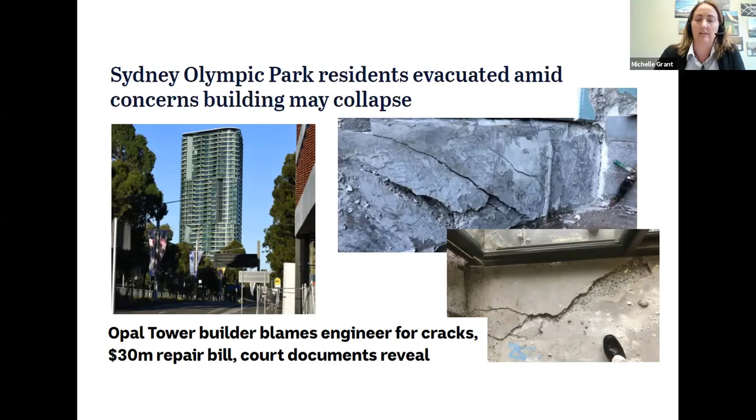In 2019, apartment owners in 9 buildings in the Northern Territory were notified of structural issues in their buildings. They were told transfer slabs were found to be under-designed for punching shear and bending. They're being rectified at the owners' cost, estimates per building of circa $1.5 million. The engineer involved has been named, deregistered from the Voluntary National Engineers Register, and fined the maximum available penalty of $6,320. In 2019, this one in Canberra, a 120-unit apartment building was issued with an emergency order to prop concrete slabs after it was identified there was an imminent risk of punching shear failure.

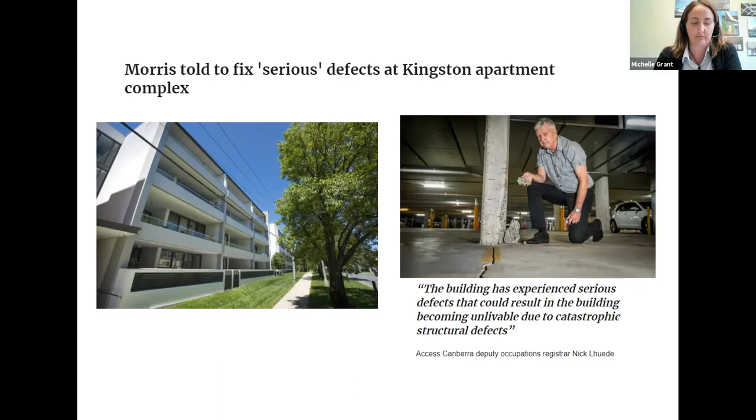And more recently, another one in Sydney in 2019, 10-year-old Mascot Towers, was evacuated after structural concerns were raised. And this was a week before our conference: two 22-storey apartment towers in Sydney were issued with orders preventing owners and tenants from moving in after serious defects were discovered in these buildings.

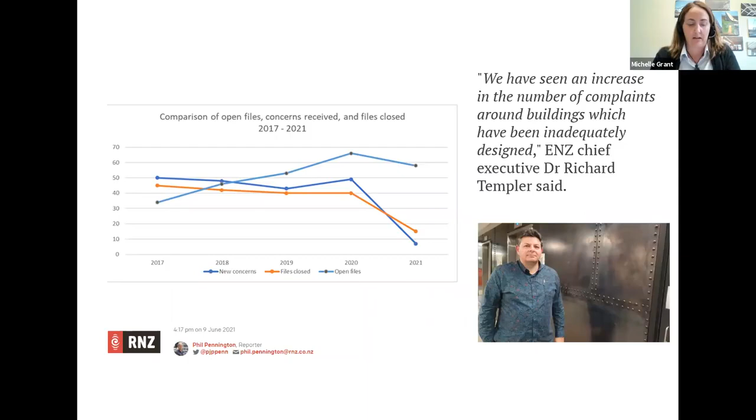Closer to home, back here in New Zealand, we are facing our own challenges. We are still expected to donate huge amounts of time to the development of standards. There's no model around funding of independent technical persons on standards, no model around standing committees and things like that. Engineering New Zealand tell us that we have a mounting backlog of complex disciplinary cases against engineers.

We have a competency system that's currently undergoing review, with Engineering New Zealand acknowledging high-profile failures are undermining public trust and confidence.

We still have poor designs being designed, consented, and built. We have frustrated building consent officers and peer reviewers, with building control officers saying they're getting pushback from engineers who struggle with the scrutiny, which is a natural part of a building consent process.

We have building owners who are being caught out with non-compliant buildings and are losing significant resources and money. So how does this help when we're thinking about new beginnings?

When preparing this speech, I found a quote which really resonated with me, and it was that new beginnings are often disguised as painful endings. And look, there's no doubt that there's some painful points in the things that I've just discussed. I know it's painful when there's another headline on RNZ about another building which has not been designed properly.

But I also see change. And I think in the future, we'll look back on where we are now as a pivotal moment or time for our profession. I see some new beginnings on the horizon. And while this won't be short term, when I look to the future, it does give me some hope.

Case in point, the conference this year was our most successful to date. 4 years ago, we had 230 odd people attend. 2 years ago in Auckland, 260 odd people. This year's conference, we had over 350 people attend.

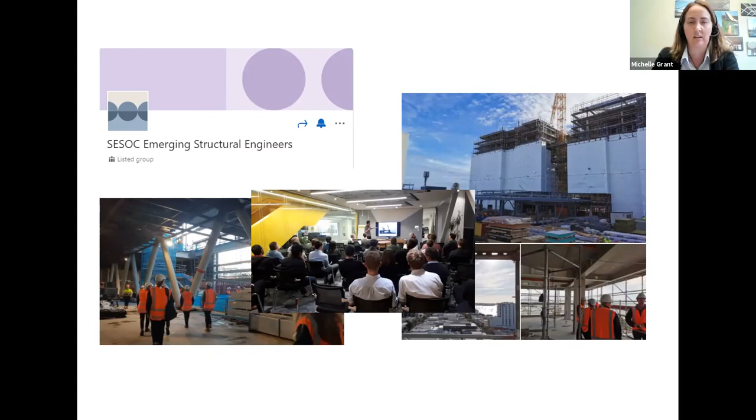In the last 10 years, SESOC membership has grown from 1,380 members to just over 3,000. Our emerging structural engineers group has been established and is flourishing with over 785 members at the time of our conference. We're making some progress in terms of diversity.

To point out the obvious, SESOC has a female president for the first time in 33 years of its history. 3 out of 7 elected members on our management committee are women. Within our professional circles, we have a woman heading the NZSEE and filling the role of President of Engineering New Zealand, and as of a couple of weeks ago, the chair of the New Zealand Geotechnical Society.

Recently, Engineering New Zealand launched their CPENG review process. They've been engaging with us on changes around CPENG. So there's some promising signs that we'll see some change coming in the CPENG space.

We also have a very real chance of occupational regulation going ahead this time. The consultation document that MBIE put forward recently shows a pretty good awareness of the issues that our profession's facing. And more importantly, it indicates a political willingness to proceed with changing the system.

We seem to have more of a consensus as a profession that we need change, more of a groundswell that something needs to be done, even if all of us don't quite agree just yet on what that something might be. We've got the construction sector accord, and part of the transformation plan, central government have specifically targeted the regulatory environment for review.

It's quite refreshing to see a government plan acknowledging the inefficiency of having 69 councils processing consents across New Zealand, and starting to actively talk about finding a better way. So a reason for optimism and hope. And it does feel like there's some new beginnings in our future.

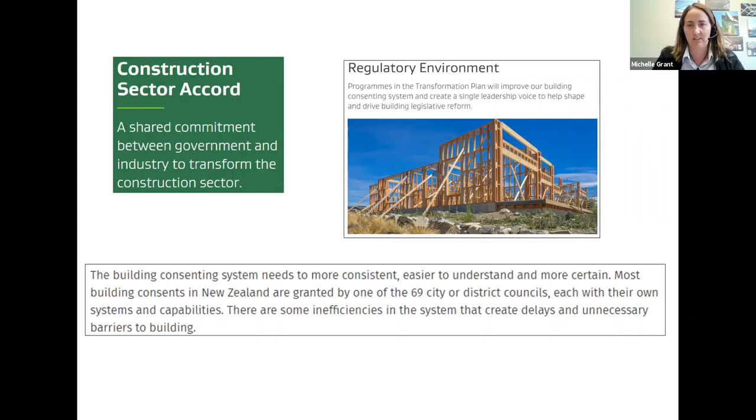This year, for what's left of the year and into next year, I'd like to encourage everybody within SESOC to talk about the changes that you would like to see. For me, with everything we do as a profession, from university teachings to MBIE governments to design office practice, in my opinion, the most important thing is that we have the right systems in place to get it right where the rubber hits the road, that our structures are being properly designed and then built.

Call me an optimist, but I honestly believe no one sets out to do a poor job. No engineer wants to design a non-compliant building. The personal toll to all of us, if we're involved in anything around poor design, is huge. Toll on mental health, financial risk, reputational damage.

In 2013, John Hare penned a paper on the state of seismic engineering in New Zealand. And in this, he reflected that there's clearly engineers actively in practice who are perhaps not aware of their own limitations.

He referred to a paper which talked about a cognitive deficiency as opposed to an ethical deficiency. So to paraphrase, poor engineering is being done by people who just don't know better. And this may be the biggest failure of our current system.

University teaches us the principles, but it's when we start working that we learn the application of structural engineering. And in this regard, it can be the luck of the draw. A graduate coming out of university, someone moving here from overseas, these people will be trained by the people they work for. So the people they work for need to be competent.

We owe a duty of care to the next generation of engineers to ensure they're being trained by people with the appropriate skill level. That being the case, while I'm SESOC's president, I'd like to focus on service for our practitioner members. By necessity, a lot of the work we do in the SESOC Management Committee is political, high-level political work. And while that is important, the main thing I want to know as a practicing engineer is how to design it right.

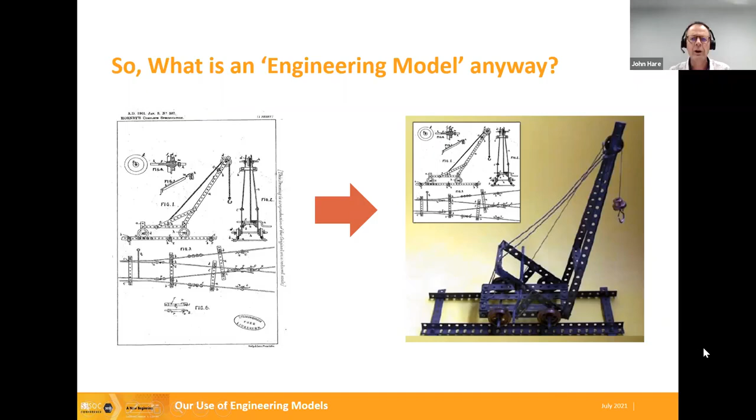What is a model? I think is a key question here. So lots of people, some people, at least as children of about my age, probably used to play with Meccano, for example. And as you could see, we could work in those days from a little drawing like this, perhaps, and eventually produce a model like that, perhaps, or better still, work from our own imaginations and come up with something. Times have moved on.

We're much more likely these days for kids to have things like Lego to play with.

And that's another way of thinking about what some of the original engineering models are, perhaps, that we think about as we grow and develop as people. I could say we then go on to school and university and have some of the creativity knocked out of us until such time as we get out into practice and try and develop it all over again.

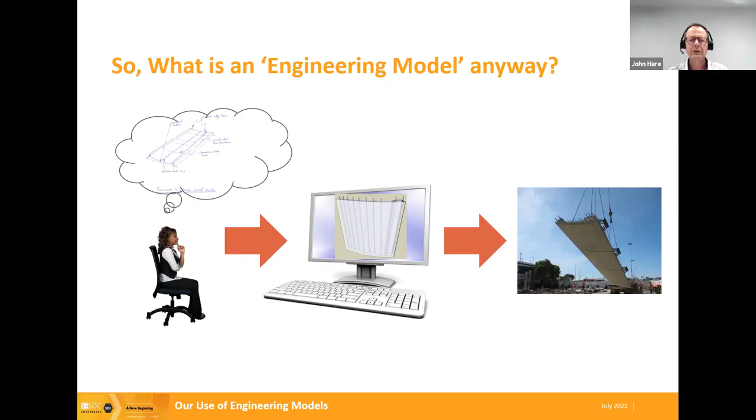Now, a group of two people, David Elms and Colin Brown. David Elms, a former professor at the University of Canterbury, got together at some point and put a lot of names to the different types of models. I think they had around about 16. I'm only interested in the 4 that I think are the ones that we mostly use.

First of those is the conceptual model, the paper napkin sketch that we do, the thing where we start thinking about how we develop whatever it is that we're setting out to design. That might flow through into what they termed a learning model. That's where we might start to get onto that computer we talked about and start testing different aspects of that. We might start designing parts and components, so we might have a model which is all of the system that we're looking at.

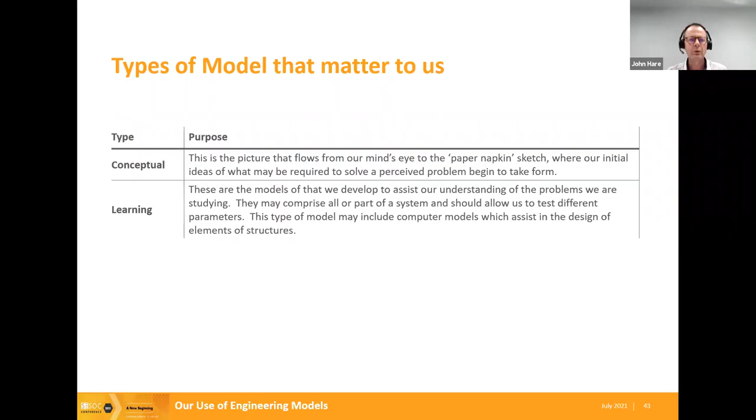We can then think also of an analytical model, and it's quite important to distinguish the definition of an analytical model here, which is what we use to validate our solution. So it might be something like a time history analysis, for example, as distinct from learning models, because most of what we think of as analysis is in fact preparing the assembly of those learning models.

And finally, the blueprint models. That's actually what people build from. So that's the drawings, the BIM models, whatever it may be, specifications - effectively the set of instructions that we pass on to a builder to then implement our designs.

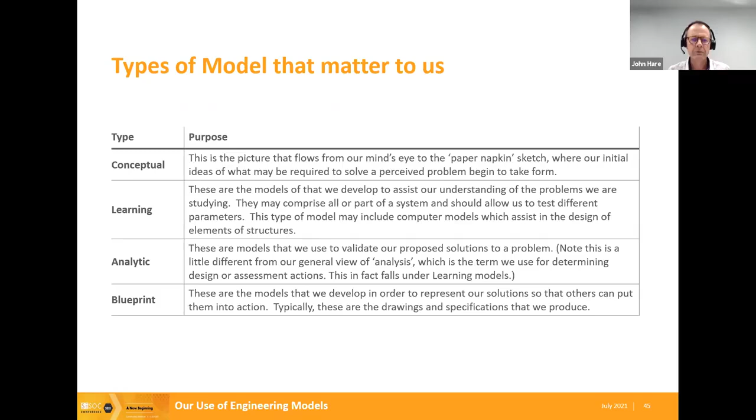One of the things we should always avoid is what's termed a prediction model. In fact, the word predict is a bit of a dirty word, I think, in structural engineering. The reason is because a real prediction is a forecast of exactly what will happen, and it requires us to know all sorts of things about all of the data which may apply and everything that may happen to our building, assuming we're talking about a building in use. So by definition, because the building is not even built when we're thinking about it, we don't have the information to be able to predict accurately things that are going to happen.

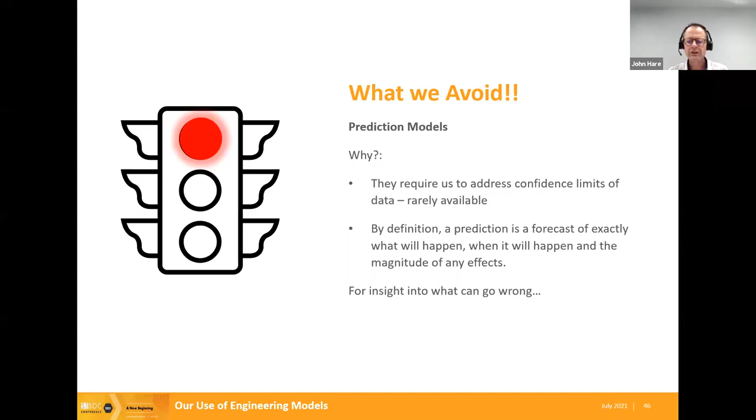Just to show an example, which I'm happy to say is not actually from structural engineering - it's always nice to learn from others' mistakes, but something which is illustrative of exactly what can go wrong. This is a toll road near Brisbane Airport, which opened some years ago now, nearly 10 years ago, and failed within 1 year of operation. The reason being that the traffic only ever reached 25% of the forecast levels.

And it all ended in lawsuits. It was estimated, or I think it's believed, that the engineer responsible for the traffic data may have ended up with about $80 million settlement against them, which is horrendous. But the reason it went that way was because they actually used their models, which were really only learning models and essentially flawed in a whole host of ways, to make a prediction. They characterized it as such, and as a consequence, that was part of the reason why they lost the lawsuit, I think.

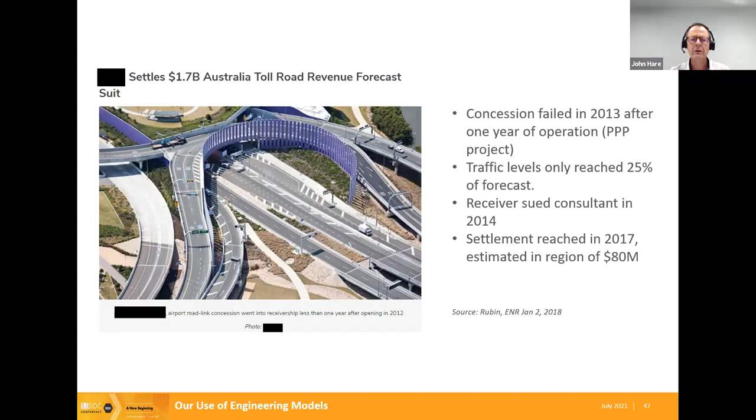The important thing we can take from thinking about our models is we should never be blindly led by the computing models. That very first conceptual model we develop is probably the most important one of all, because that's where we develop our picture of what success will look like.

If those learning models show us something different, we shouldn't assume they are correct. We use those models to test our understanding and inform the decisions we make going forward. But what happens if they don't agree? Generally, our computer model should corroborate our conceptual model. If they don't agree, either the computer model is inaccurate or our conceptual model is inaccurate. Don't just assume the computer is always right.

I find it helps when we're looking at these learning models to think of some key principles. These have got slightly long-winded titles, but I'll go through them anyway. You don't have to think of them this deliberately, but you want to keep these concepts in mind.

First of all, the principle of requisite detail. There's a minimum level of detail necessary to make sure the model emulates what it is we're trying to model, which is fairly obvious.

At the other end of the scale, the principle of design invariance: it's sufficiently detailed if adding more to it doesn't make any difference to the outcome. I think that's one of the traps which is easiest to fall into - we keep on modeling things even though they make no difference to the outcome, fooling ourselves perhaps that we've done a better job in the process. We haven't. We've confused accuracy and precision, and I'll come to that later.

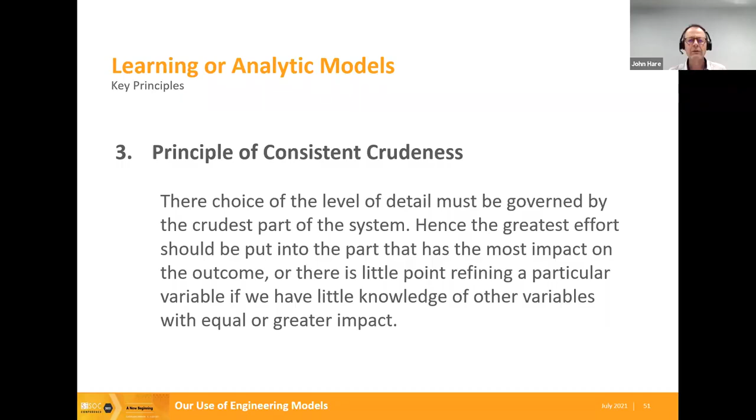Finally, the one I like best, the principle of consistent crudeness. There's no point being more detailed in your model than the crudest part of the system. Another way of looking at that is you should put the greatest effort into the part of the model that has the most impact on the outcome. Otherwise, you're not necessarily getting at what it is you need to get to. Another way of looking at it is don't ignore the elephant in the room - always work where you're going to have the most impact.

In other words, your model should be as simple as possible to tell you what you need to know, but not so complex as to lose sight of the real issues. And of course, don't ignore the elephants - make sure as you go through your modeling process that you don't leave behind something which is going to prove to be a problem later.

It's important to consider the roles of assumption and approximation in our models. The underlying issue is it's never practically possible to model everything, so we use assumptions and approximations in order to be able to move forward.

Assumptions we have to make generally need to be either conservative enough that we don't need to go back and look at it later, or near enough to what we believe will be the case that we can verify it later. On the conservative side, think of what we do when dealing with reinforcing steel - we assume a 95% characteristic yield stress, meaning a value low enough that most steel will be better than that, and we're sufficiently close that we don't need to check every piece of steel later. We build that in and tend to think of the steel as exactly that strong, but in fact most of it will be a lot better - 95% of it, in fact.

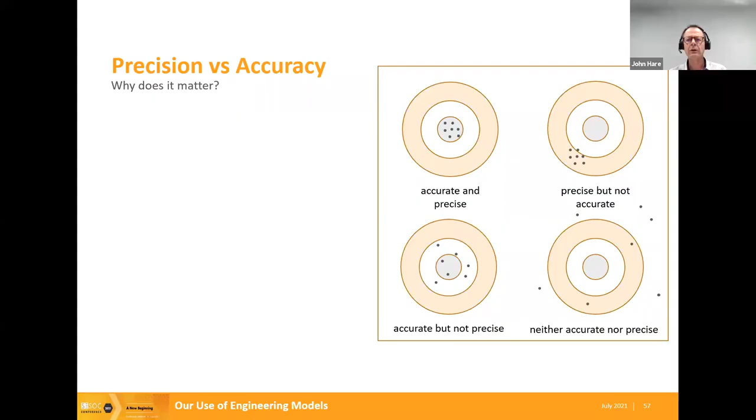Why does it matter? Well, false precision is a common trap. It fools people into thinking that they're right, when perhaps all they are is consistently wrong.

It's always important to be accurate, but it's not always critical that we are super precise. I'm sure many of us have thought about that when we see answers presented to 3 decimal points when really a factor of 10 would be fine.

It's always good to be as precise as you can be, but only as good as the data allows it. You can't be more precise than the data. In other words, if data is supplied to you accurate to 1 decimal point, you can't get a 3 decimal point answer from it.

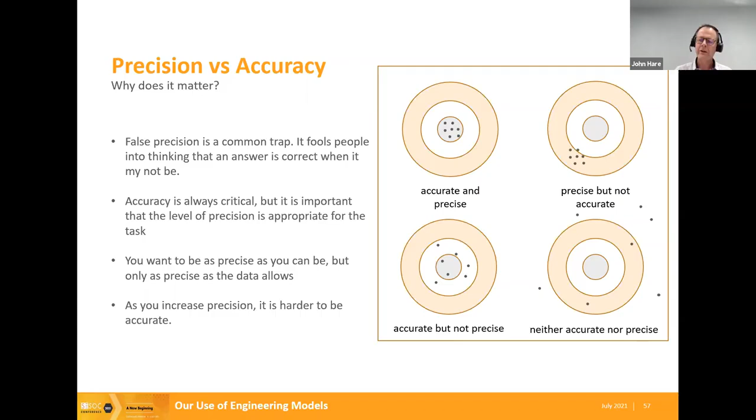Another important point: as you increase precision, it's harder to be accurate. That sounds a bit counterintuitive, but let me show you an example, again using my dartboard.

Is it possible to be too precise to get in the way of accuracy? If you think about putting a splatter on a dartboard where you're attempting to be quite precise, you can miss quite happily. However, if you attempt to be less precise, then you can take in the whole thing. So it's possible you can actually benefit from being less precise.

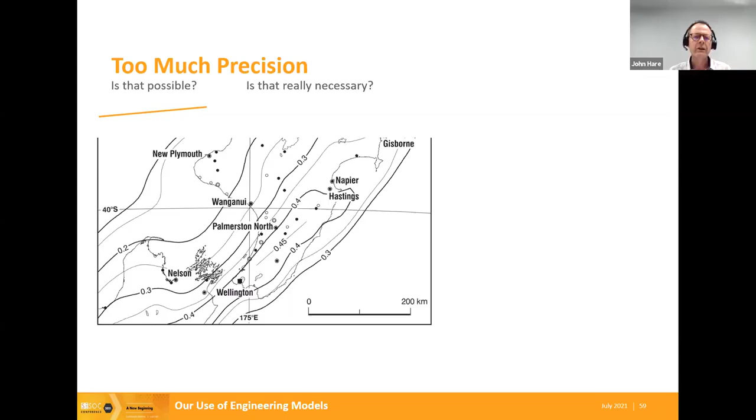But really, when you think about how accurate, or how precise I should say, the seismological investigation is, is it really that important? You could argue, and I probably have, that maybe we just need a couple of zones in the country. We can still be just as accurate with our designs, we simply won't be so precise in calculating the loads. That might allow us to think more carefully about what we're designing, instead of focusing on whether we can shift the isoseismal line a millimetre or two.

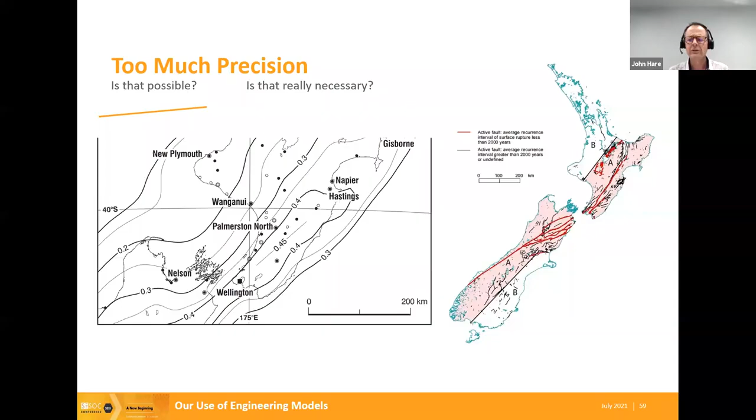Another example where this can be a problem: think about the difference between ISAs and DSAs, which one is better? The example I'm showing you now is one where a DSA turned up for a small building, very shortly after the earthquakes, with 9% on it, which, when you look at that little structure, a single-story school building, you'd have to say, why would that be?

And the answer was because someone had looked at it and said, this is potentially liquefiable ground, we'll halve the number. Okay, that would have got it to 18%. Why was it only 18%? In fact, an ISA, which was formed on a very qualitative investigation, came up to 55%, which is much more representative of that building.

Is it more important that we go to precise numbers when we're calculating these things, or is it better to go and have a proper look at what we've got and actually think about the qualitative aspects of this, which might have a greater influence on the outcome?

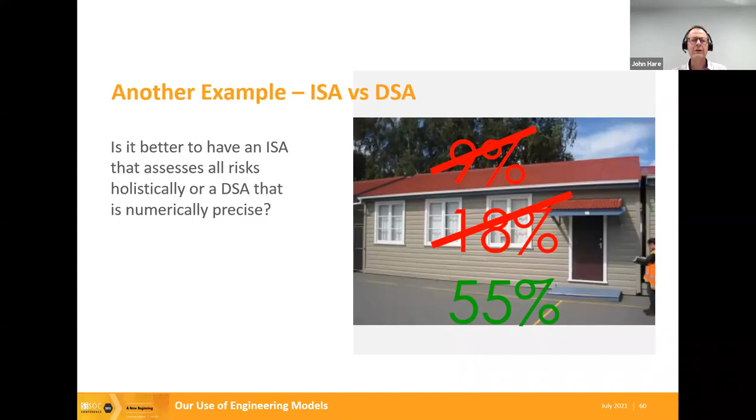One of the frequent questions which comes up in people's minds is when to stop modelling. At this point, I'd simply go back to those principles once again: decision invariance, when you've got the answers you need and when you're not making any difference to the outcome. But I've added one point here, which is when your boundary assumptions align.

One of those things we've always got to be conscious of is that we need to make sure that what we're designing is consistent with what we're actually going to be dealing with. A classic example of that is when we don't have the geotechnical conditions actually physically on site that we have assumed in our model.

Just noting a point here, theories can be right or wrong, but models can be right, but they can also be irrelevant. It's important to bear that in mind when we start looking at those other effects, the boundary assumptions.

Another issue I've come across in the past is this question about whether the model drives the design or does the design drive the model. Now, it should be the reverse, but an example of where that can go astray is often in some of the most simple structures we do.

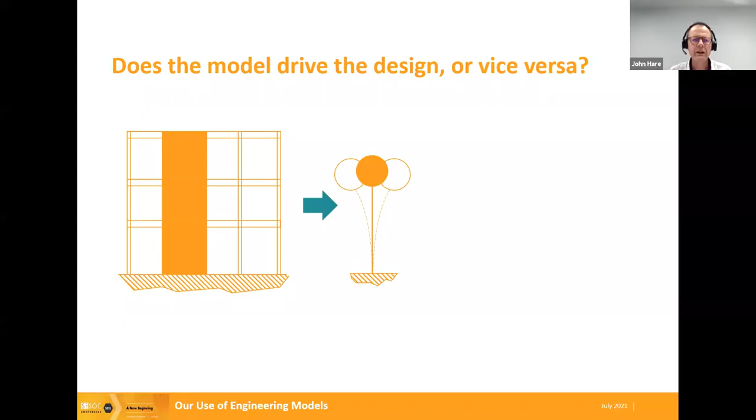If we think of a building such as this schematic I've drawn here, classically we think of our single degree of freedom oscillator, and then we come up with a model that suits that after we've analysed it, which says in order to get that action, we have to pin this thing very hard to the ground, and so we end up putting a lot of piles. It makes for a very stiff structure. We have high seismic demands.

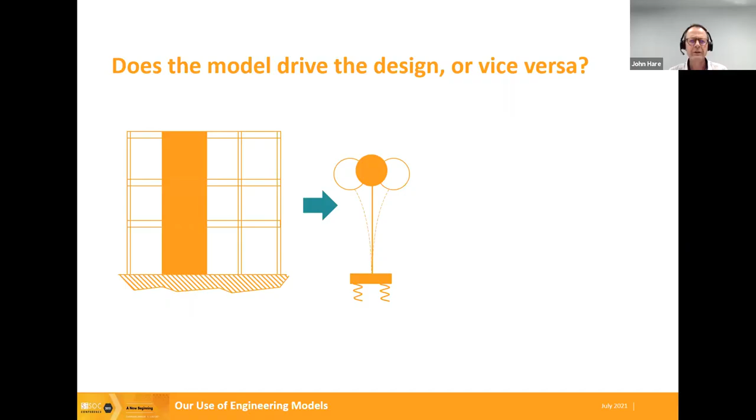If we thought of that a little differently, though, what if we thought about actually allowing some movement at the base? Not so easy to model, but much more reflective of how many structures actually perform, which would allow us to use a simple shallow foundation. The consequence of that is we might have a rocking foundation. Shallow foundations, higher drifts, actually gives us lower seismic demands, provided we can deal with those drifts. And we might end up with a much more efficient structure.

The reason why a lot of buildings end up with piles under them is simply because that's the way people think of the models, and that's how we satisfy what the model is telling us. If we ask the model a different question, might it give a different answer?

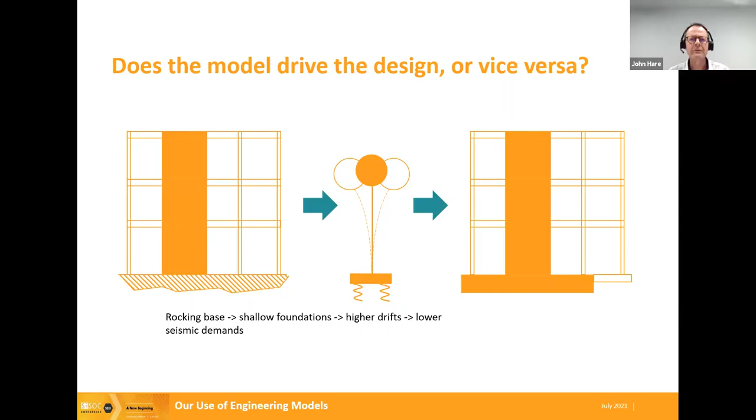Which leads to one of the worst things I think that can happen, which is part of the issue with models. Sometimes we do stuff because we can. We don't always think about whether the tool, the model, the computer in this case, is leading us forward or whether we are using it.

We've got to be very careful that although we have the capability to perform all sorts of advanced computer analysis, we might just be kidding ourselves, and we might be going down a path which simply says more precision, but potentially less accuracy.

So getting towards the end here, a bit of a summary. What are the key points of success? Well, first of all, know what success looks like. And I think that's where we need to think about what our role is. We need to make sure that we understand that, not just from our perspective of whether we successfully modeled something, but whether that's actually contributing to a successful outcome for our clients.

You should always have a clear concept in mind before you start getting into the computer modeling. And you should always really understand what the question is before you start looking for the answer. So you need to be clear what you want from your model and drive it in that direction, as opposed to having it lead you.

Always use the simplest form of model that can capture the problem. That way, you're not going to get lost in the data that emerges from it, and you're always going to be most focused on what it is you need to find out. And a final one, slightly new: remember, someone's got to build these things that we design. So only model what can physically be done. Just the slightly tongue-in-cheek version of that, I guess.

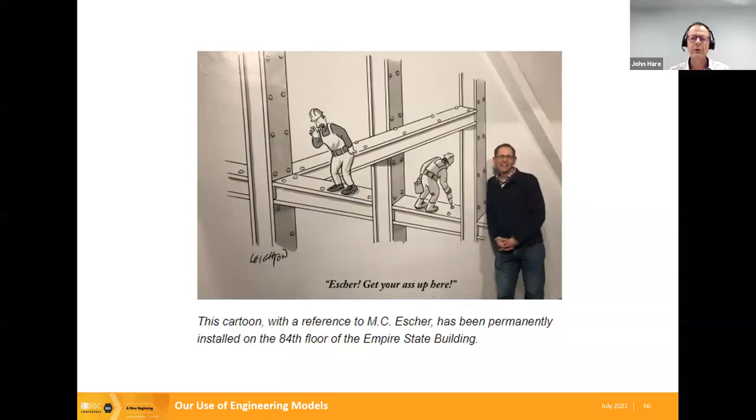We might laugh at this, but I swear sometimes I have seen drawings which were somewhat like this. So the final word to everyone there is: always be conscious of looking critically at your work, and being sure that the set of instructions you're issuing, those blueprints, are actually something that can be executed. Thank you very much.

Thank you, John. There are some great messages to keep in mind the next time we're tasked with an analysis project, I think, before getting too caught up in the detail.

For those who haven't been to a conference before, there are a range of different styles of presentations, from the longer keynote addresses given to the whole conference to the paper presentations, which are typically 15 minutes. One of the more fast-paced sessions are the lightning talks. Each presenter has just 5 minutes to capture the audience's attention and deliver their message.

So we have two of the lightning talk presenters next. First up is Andrew Blackford. Andrew is a structural engineer as part of the pre-construction team for Naylor Love. His lightning talk at the conference looked at the design to construction process: a seismic chasm, or a bridgeable gap.

Brilliant, thank you for that intro, Laura. Afternoon all, and thanks for dialing in. So yeah, design to construction. All of us have been through this evolution of turning our thoughts, drawings and specifications into the built environment.

For some, and on occasion, it may not have been a successful journey. Rightly or wrongly, success these days is often defined by price, and in particular, whether the price to build matches the budget allowed for. In my experience, it is rare that an unsuccessful outcome is due to the structural environment being too efficient or too heavy.

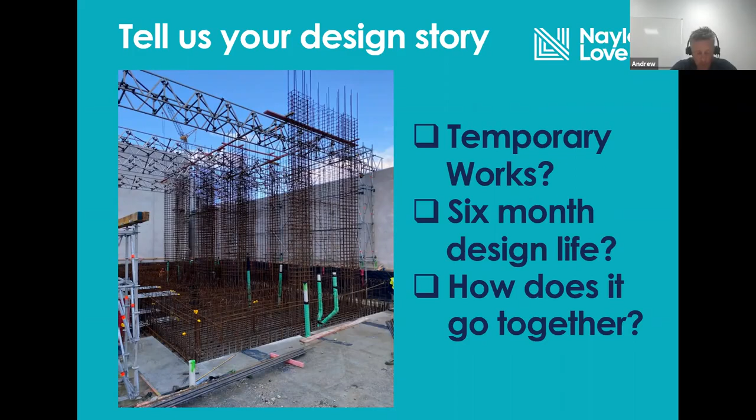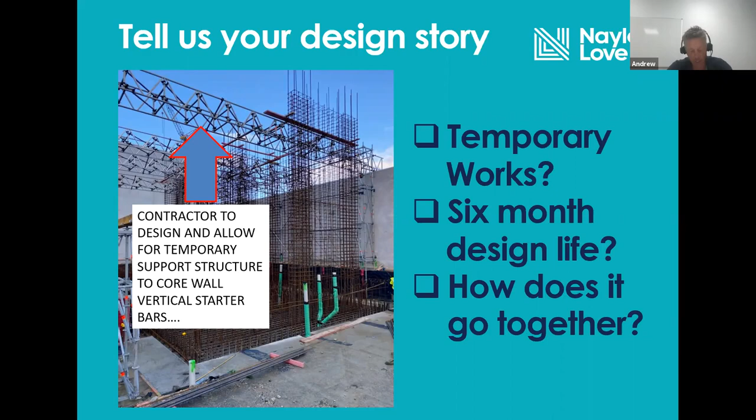Don't be averse to adding a few notes to your drawings to convey these messages. It is often the most cost-effective way to portray and understand what is required. Remember critically that you are designing the final state, whereas the contractor is more concerned with the journey to that final position. If there is a misalignment between the design assumptions and the contractor's methodology, you are likely to end up in a contractual debate.

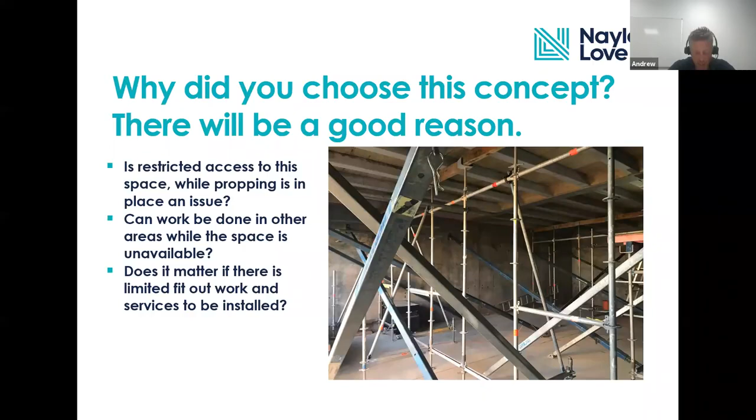As an example, is the restricted access under this floor until the props are removed an issue in terms of progressing fit out and services installations on site? Or does it not matter as the space is lightly serviced? Was it even considered during concept design that what goes in the building might be more important than the building itself in terms of meeting the target deadline and the client's brief?

A good structural concept—and I think this is one key message that we often fail to recognize in structural design—is that a good concept is one that is sympathetic to the remaining 75% of the building that needs to be built. As structural engineers, that's roughly speaking what we are responsible for in terms of cost.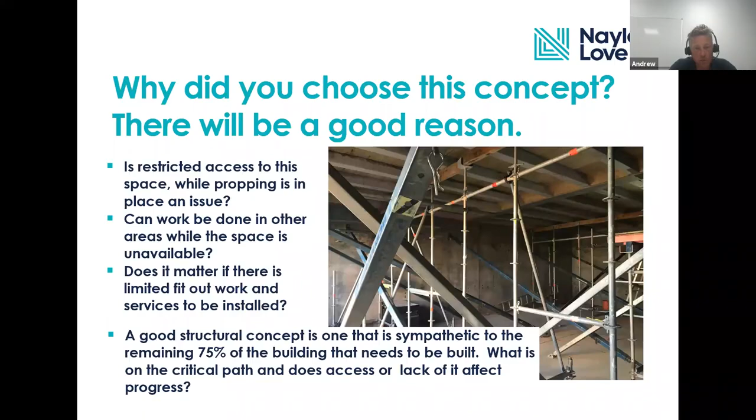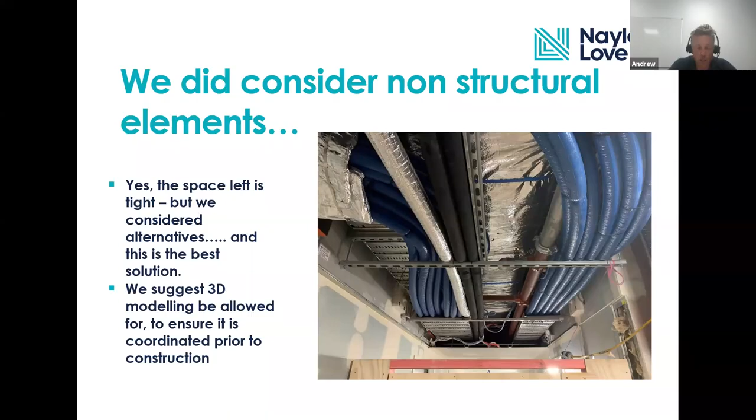Were alternative schemes discussed that provide more flexibility? And if so, why weren't they presented as alternatives at the time of concept? Generally there's a good reason why you ended up with the concept you did. It's often these intangible elements that can't be measured in kilograms of steel or cubic meters of concrete that lead to a misalignment in expectation, a gap between what we perceived and what actually eventuated. The gap is not due to a lack of skill or thought, but often a lack of communication. Often you know exactly how you perceived the building going together and what will be required. It's just that nobody else did.

Are terms like programming, procurement, construction sequencing, tolerance, temporary works front of mind when designing a new structure? Probably not. They're historically the domain of a contractor, but increasingly they're having a significant impact on the cost of construction, and therefore should be discussed during the design phase of a project. If you don't understand these terms, then who else in the design team does? Who is providing the advice, and where is the knowledge coming from so informed decisions can be made regarding buildability, build durations, and how these affect pricing? Contractors know this stuff, and without exception they will share it with you. You just need to ask.

So should we be strengthening the links between engineers and contractors so the relationships are there to foster collaboration and information sharing, so designers can learn and designs are cognizant of these critical aspects of construction? In my opinion, the answer is yes. So how could we go about this? At the individual level, one of the most beneficial things you could and should do to develop your career is build wide contact circles within the construction industry.

Whether this be with main contractors, subcontractors, or other consultants, their views will be different to yours, and regularly seeking their input will enable you to develop a more holistic view of design. Talk to them regularly and ask for feedback on present and historic designs. Don't be afraid to discuss your current projects with your peers and other contractors, even if the project hasn't come to market yet. There's really no commercial reason to prevent you from seeking advice.

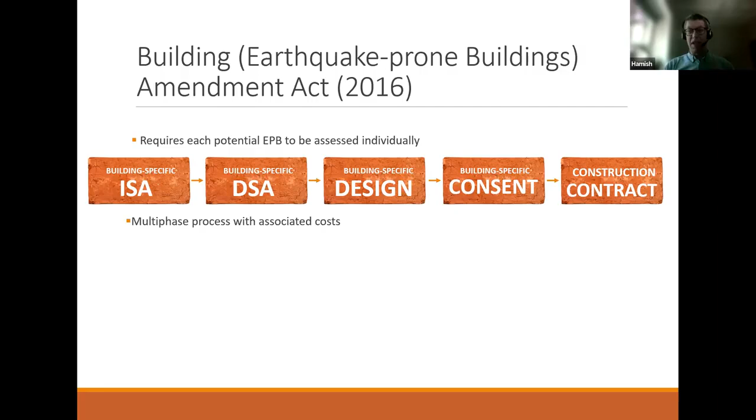The way we deal with those buildings at the moment is through the Earthquake-Prone Building Act. What we need to do is assess each building individually to understand exactly how earthquake-prone it is. Many of you will be familiar with this process, which takes us from an ISA to a specific detailed seismic assessment, a number of design phases, and potentially some consenting before we start spending money improving those buildings and how they might perform in an earthquake. It's a multi-phase process and can be quite costly.

Skimming over this for time, but there's been quite a bit of research into the effects the Earthquake-Prone Building Act has on those communities. To summarize, it seems likely that demolition of a large number of those buildings, or abandonment of some, is predicted, and that their heritage status may not have an impact on which ones are retained.

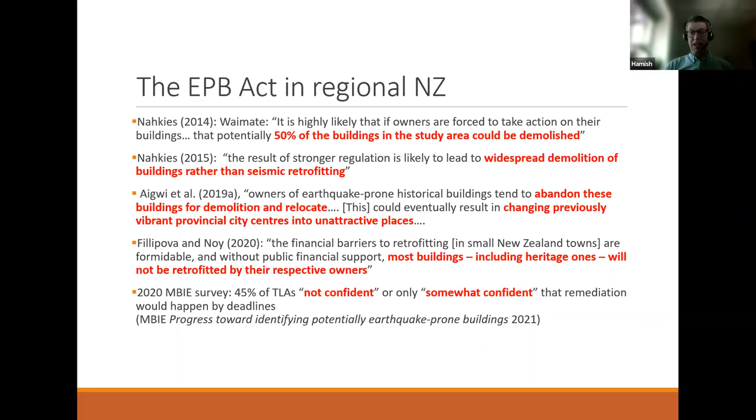The most recent data is from MBIE, who published earlier this year a survey they carried out in 2020, showing that a number of the territorial local authorities are not that confident they will get to remediation by the deadlines in the Earthquake-Prone Building Act.

So if we look at the outcomes we might predict from current settings, we've noted that some buildings are not going to get retrofitted by the Earthquake-Prone Building deadlines, or perhaps at all, that they're likely to be clustered into regional centres, and that the rental returns for those buildings are relatively low, which affects the owners' ability to fund a bespoke strengthening program.

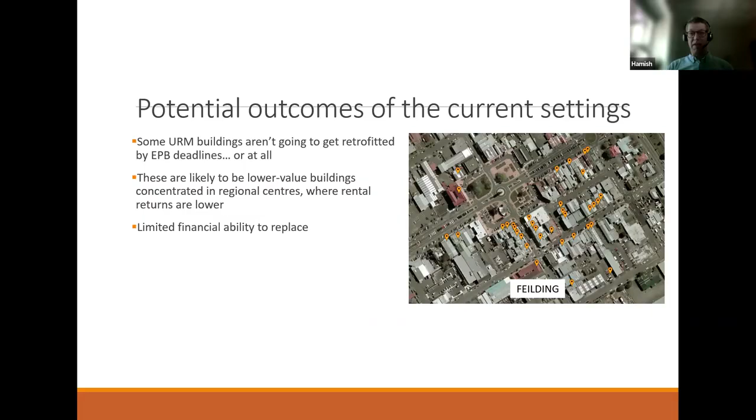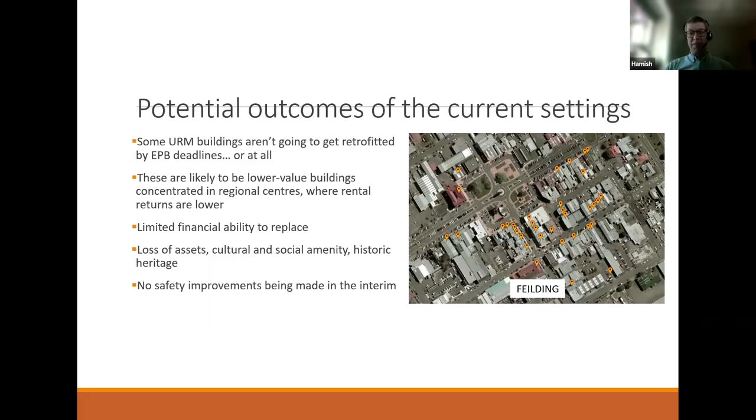Similarly, if it's difficult to fund that strengthening, it's going to be difficult to replace those buildings. The consequence is likely loss of not just assets belonging to the owners, but also cultural amenity and historic heritage that those buildings embody and deliver to the communities they're situated in. And of course, if owners are trapped where it's difficult to respond to the Earthquake-Prone Building Act's imposition or stimulus, they're also unable to make safety improvements for an earthquake we might get later this afternoon or tomorrow.

So let's look at what the options might be. The Earthquake-Prone Building Act, we've shown, imposes some costs. One option is that we leave things more or less as they are, and so we'd expect some demolition or abandonment of those buildings as a likely consequence.

An alternative option might be for the government to increase funding toward strengthening those buildings. But there's possibly a somewhat limited appetite for public money to fund the strengthening of private assets, demonstrated recently by the Heritage EQUIP Fund, which the government was running but wasn't funded in the most recent budget. So another option, which I'm really here to discuss, is what we can do with the engineering, and whether there's a way to lower the engineering burden for those structures to make strengthening a simpler process.

The opportunity here is that unreinforced masonry buildings in New Zealand were built within a reasonably tight time frame, between about 1880 and 1930. Many are constructed very similarly, with a relatively constrained and well-understood set of details and methodologies. There's been quite a bit of testing from academics and others establishing the likely failure modes of those masonry structures, backed up by international testing and studies as well.

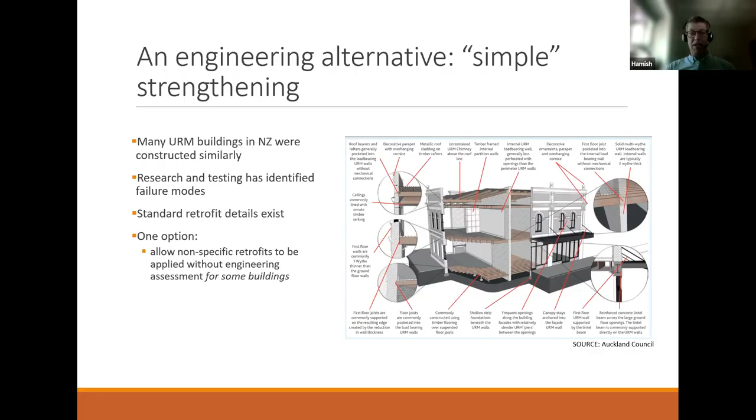In fact, some standard retrofit details to deal with those major failure modes already exist and have been published by MBIE. So one option is that we could allow a non-specific design of retrofits, which can be applied without a specific engineering assessment, to buildings meeting those criteria.

So we talk about that as simple strengthening in our paper. And I figure if it's really simple strengthening, it should be able to fit on a slide. So I'm going to try and do it in one slide.

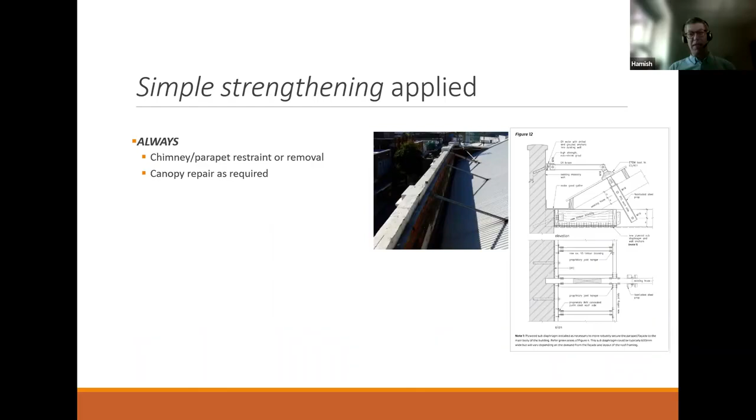If we do a simple strengthening non-specific design scheme for an unreinforced masonry building, we would always be restraining or removing chimneys or precarious parapets. We might look at canopies if the building has one and its connections need to be considered. And we would always look at the roof-to-wall and floor-to-wall connections, which those who've worked on masonry buildings understand are always a key part of those strengthening programs. Similarly, we would look at doing that at a pretty conservative set of centers rather than calculating the demand for each individual building.

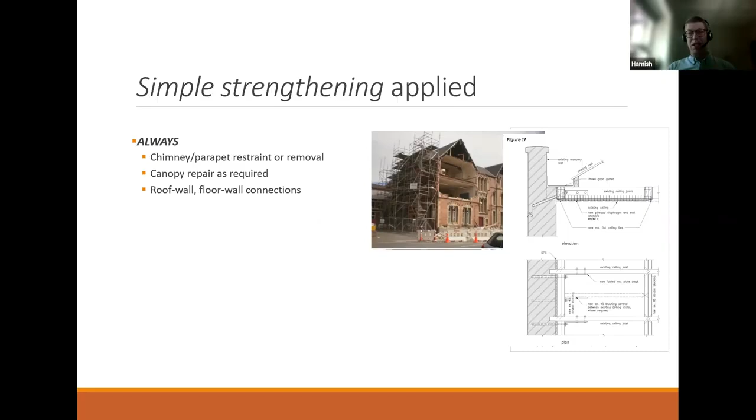So for some buildings, out-of-plane walls may require strengthening with strongbacks, potentially timber strongbacks in many cases. And some buildings will require their diaphragms to be strengthened, noting that when we're dealing with a series of shops or a row of buildings, it's possible to think about those diaphragms acting in a collective way, especially if we're able to strengthen the connections.

So the intention here is to provide something somewhat analogous to the 3604 or 4229 non-specific design standards which already exist for other materials. And to support that idea, we've been developing some lookup tables, which will be published in future work that's in progress. Really, the idea is to direct people towards MBIE details with some additional details added where required.

So what set of buildings does this proposal apply to? Jason Ingham and Alistair Russell did some work 10 or so years ago, dividing URM buildings into 7 different typologies. And we're really looking at typologies A to D, which is 1- and 2-story isolated and row buildings.

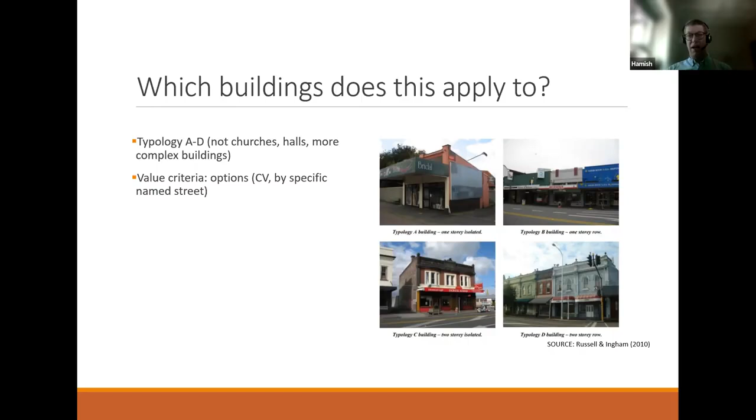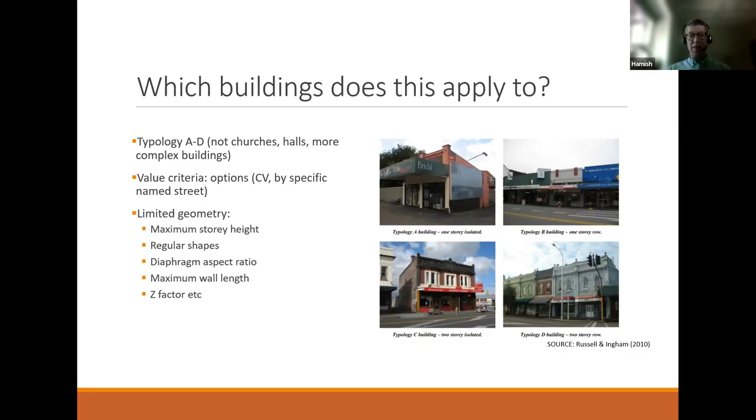We also think it might be useful to consider whether a good policy option is to constrain the buildings eligible for the scheme by value criteria. So it could be possible to use a measure rather like CV to constrain this scheme from being used on very prominent buildings in large cities, where those retrofits can perhaps be funded by other methods. It's also useful, or necessary, to limit the geometry of buildings for which this might be relevant. There would only be certain story heights and shapes, and only certain Z factors, for which this kind of scheme could be applied.

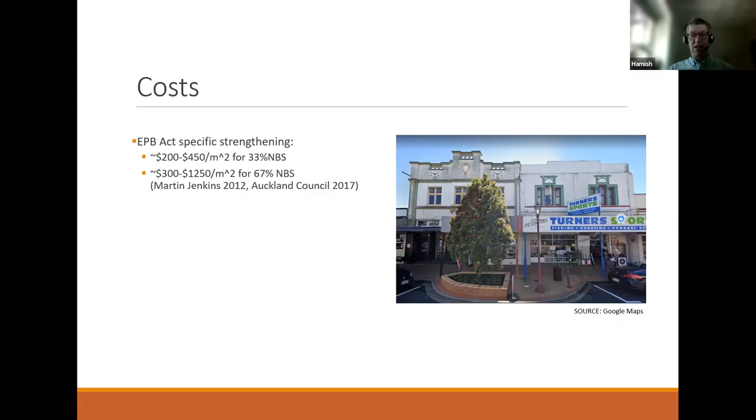So let's look at cost. When the Earthquake Prone Building Act was promulgated, there were some quite wide estimates of the cost that would be incurred by owners in carrying out what the Act required them to do. And so those estimates are also aging a little bit since the last recent one, before the Act was promulgated in 2017.

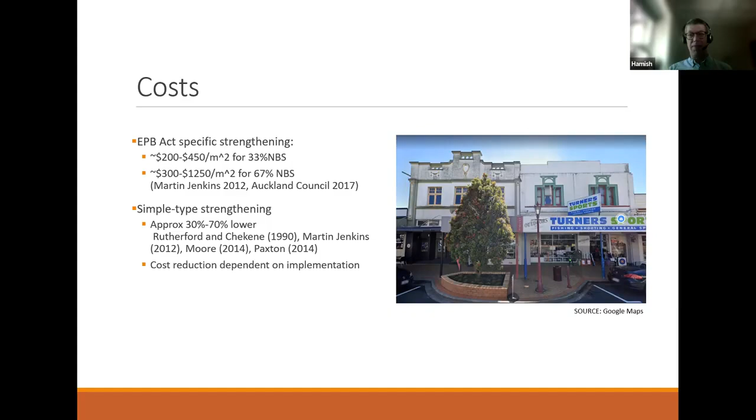So there is also some research, partly from the United States, where some West Coast cities have instituted a similar scheme, which suggests that the cost reduction could be in the region of 30 to 70 percent. Fair enough, that's quite a wide range, and it does depend on how the scheme is implemented. But the research indicates there is significant cost saving to be had, which may make it possible for owners to actually carry out these schemes as opposed to just having to demolish or abandon their buildings.

So one thing the keen-eyed will have noticed is that we have deliberately excluded in-plane strengthening from any of our commentary around this scheme. And the reason for that is partly that when you look at those in-plane penetrated walls in the picture there, with a simple strength-based or force-based analysis, it may not be capturing the full capacity. They may appear to be more fragile than they really are. And it can be that nonlinear, or pushover, or time history analyses can reveal some innate capacity which is there.

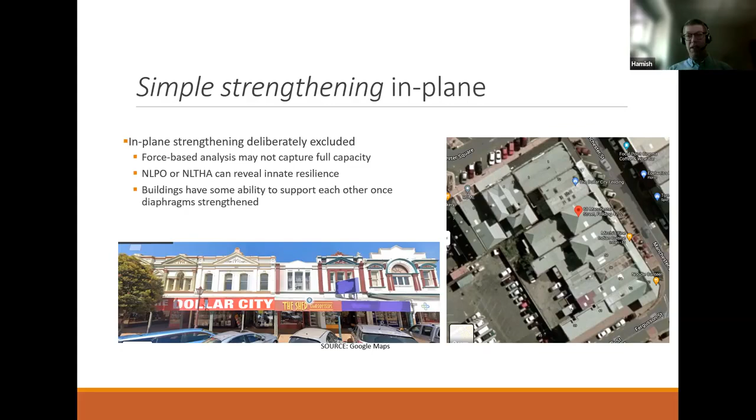So really what we're saying is we don't think the failure mode is quite as critical as it may appear. It's also possible that the buildings have some ability to support each other once their diaphragms are strengthened, and that could be through a torsional mode or through load sharing between the buildings. There are, of course, a number of issues with that, and we're working to develop more robust engineering principles to show that some of this is the case.

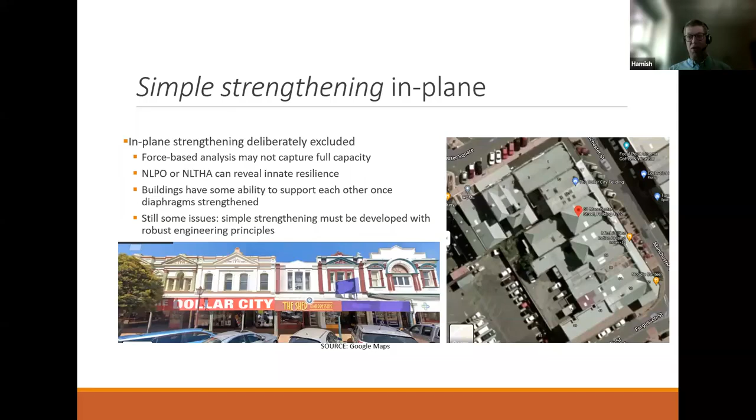So lastly, looking at percent NBS. Percent NBS is the method that we use for capturing both the likely performance of the buildings and also the risk which they present.

It requires an engineering analysis to be carried out that looks at the building on a component level. That requires a relatively specific understanding of the way the building is likely to respond in the engineer's mind. Engineers need to develop that for each individual structure in order to put their signatures and names to the score they're giving the building.

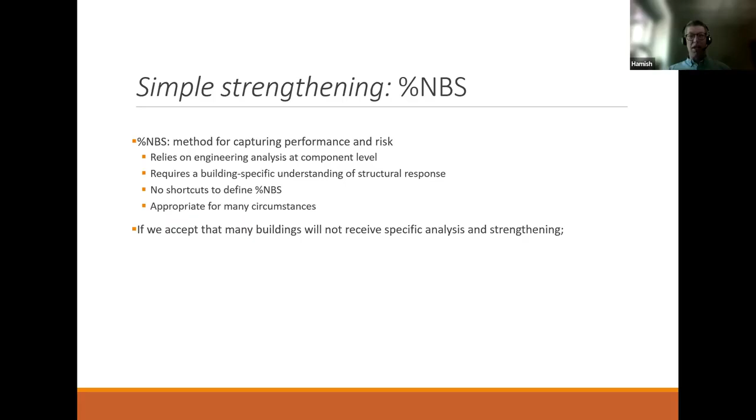There really aren't any shortcuts to define NBS, and we think it's appropriate for many circumstances and buildings. However, if we accept that there's a large group of buildings that just won't receive a specific analysis or strengthening program, largely for financial reasons, and if the do-nothing option, which might lead to demolition or abandonment, or increased public funding options are not preferred, it might be possible for us to accept a non-specific simple strengthening scheme which we know will make the buildings and the people in them safer, without seeking to quantify exactly how much safer through a specific NBS score.

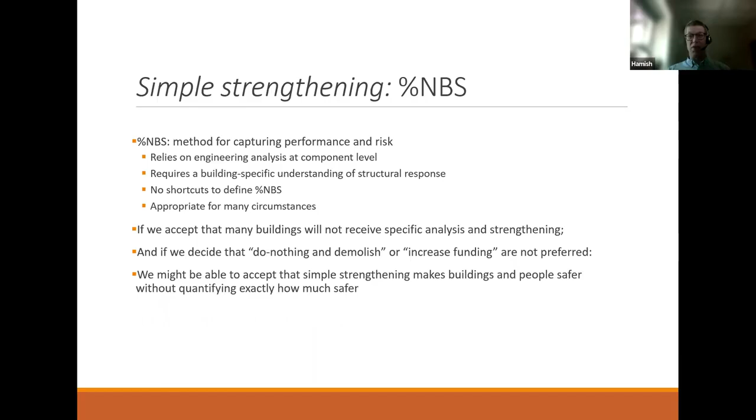I was reflecting on what John was saying earlier about accuracy and precision. If we were able to come up with such a scheme, that might remove a number of steps in the process. We may no longer need a detailed seismic assessment. The design phase could be covered by standard details, and those details could even be covered by some consenting. So we may be able to move straight from identifying the building as potentially earthquake prone to carrying out work which improves the building and its performance.

There are a number of potential issues which I won't look into in great detail for time, but there is some commentary on those in the paper that accompanied our talk, which you can get through the SESOC website.

To summarize, the research shows that there's a large cohort of buildings in smaller towns which may not be strengthened by the Earthquake Prone Building Act deadlines. In order to avoid demolition and abandonment, we might look to permit some standard detail strengthening to be carried out to a subset of those buildings. It may be that percent NBS is not the only effective way to decrease public risk and identify that we've made the buildings stronger and safer. Thanks for your time.

Thanks, Hamish. Those are some great ideas that really make us think about how we approach some problems.